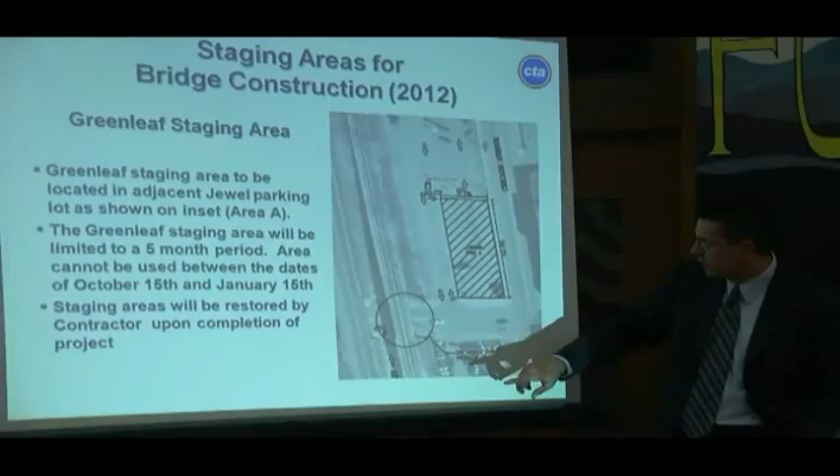We'll also replace all the ties, the rail, and the ballast on the new bridge, and improve the drainage systems off the bridge. We need to relocate many of the signal and communication cables that are part of our infrastructure system. Obviously they pass over the streets along with the bridge, so we have to relocate some of that in order to do our work.

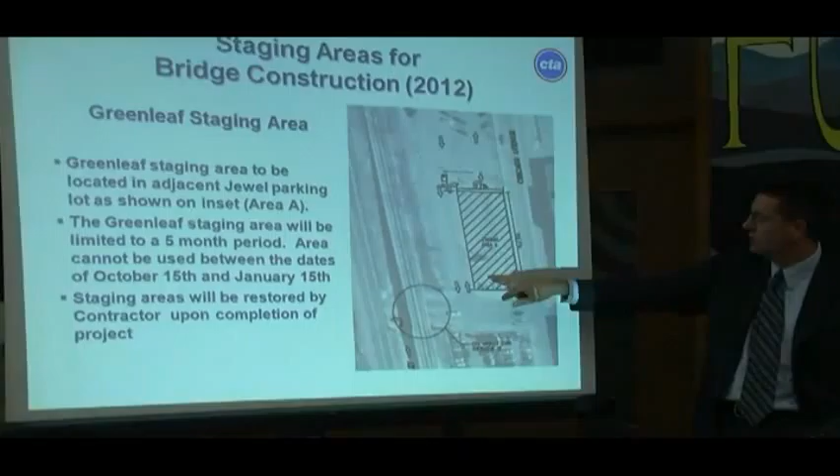Once we're done with the bridge, we'll fix the sidewalk, install new fencing, and some landscaping at selected corners of the four corners of each bridge. So we'll improve that, similar to what we did at Main and Church.

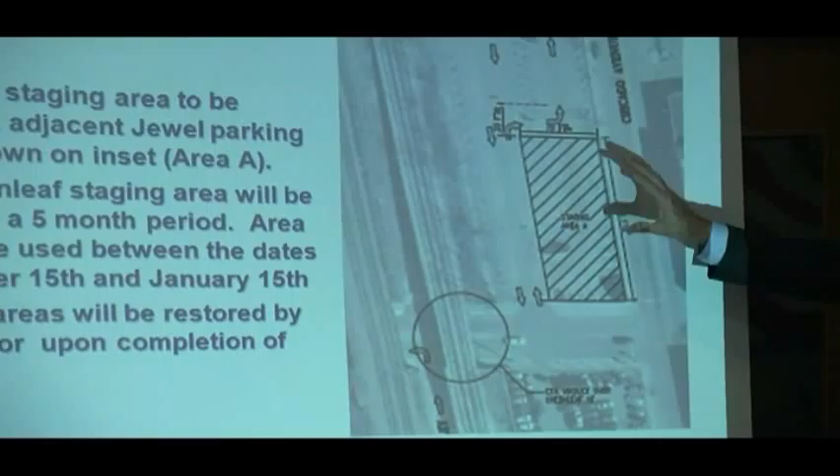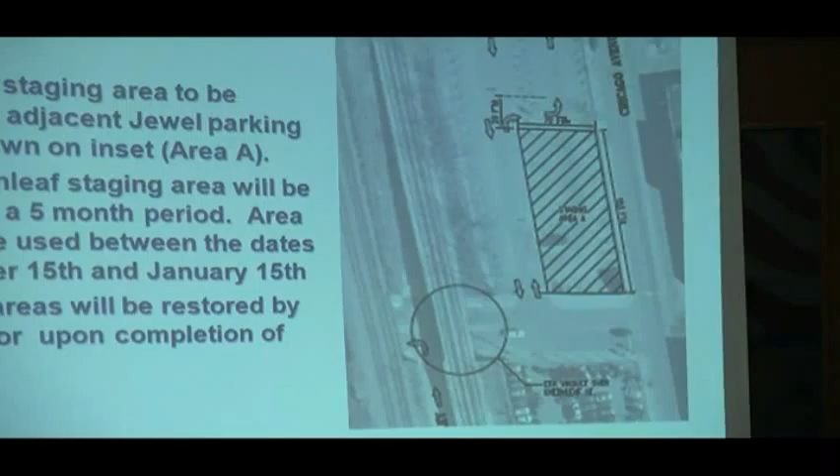We do have to modify the Dempster Station platform slightly in order to accommodate the caisson work on the north side of Dempster, so you'll see a little platform modification. We're just taking a little off the south end, temporarily putting some on the north end, so we can continue to have our normal train operation while we get the viaducts replaced.

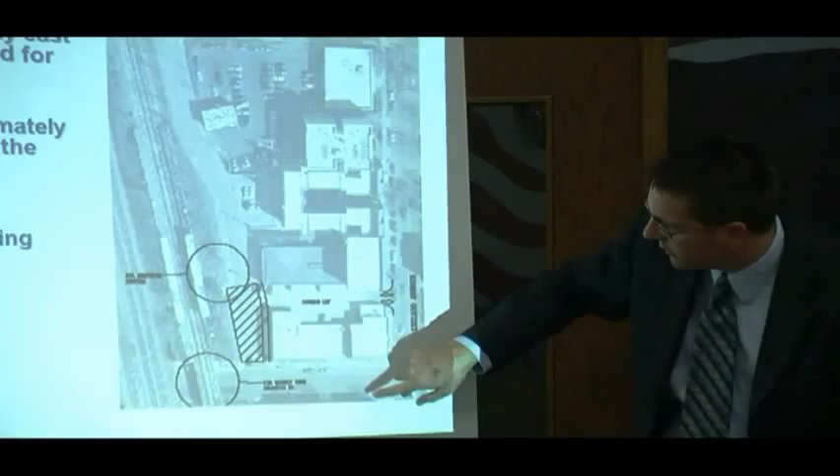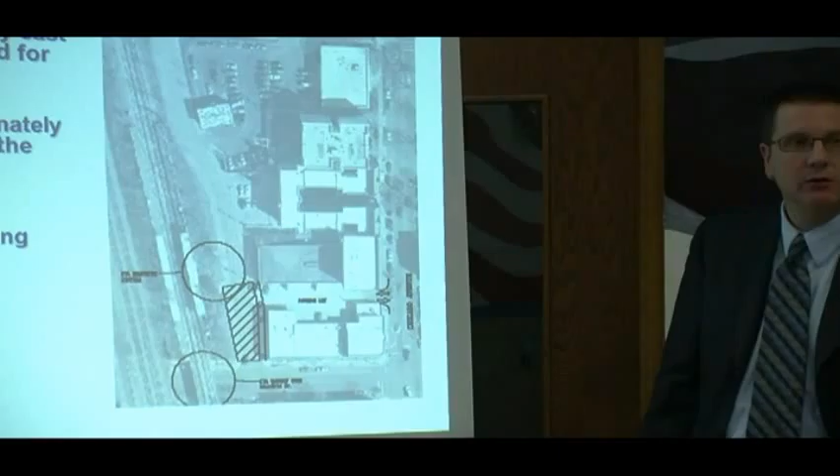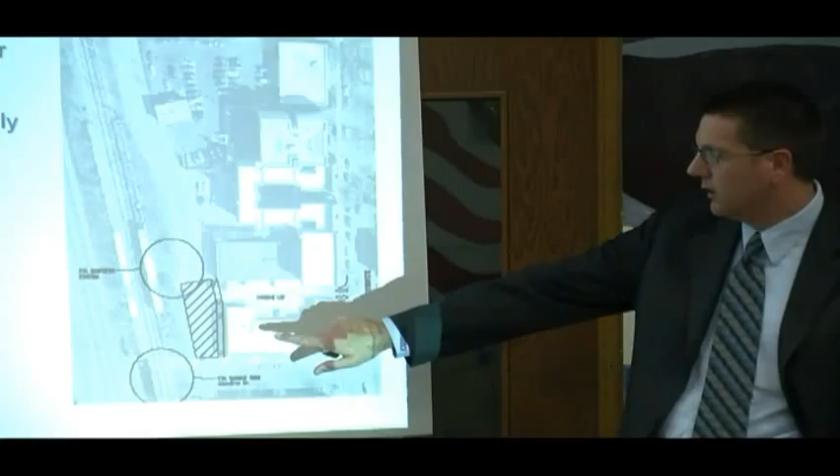Another small piece of work is we're replacing the timber retaining wall north of Greenleaf. That's a wall behind the Jewel food store. We're going to replace that with a precast wall to help hold back our embankment there. And then finally, the rehabilitation of the retaining walls along Chicago Avenue and a little bit behind Greenleaf. So that's really the scope of the entire project.

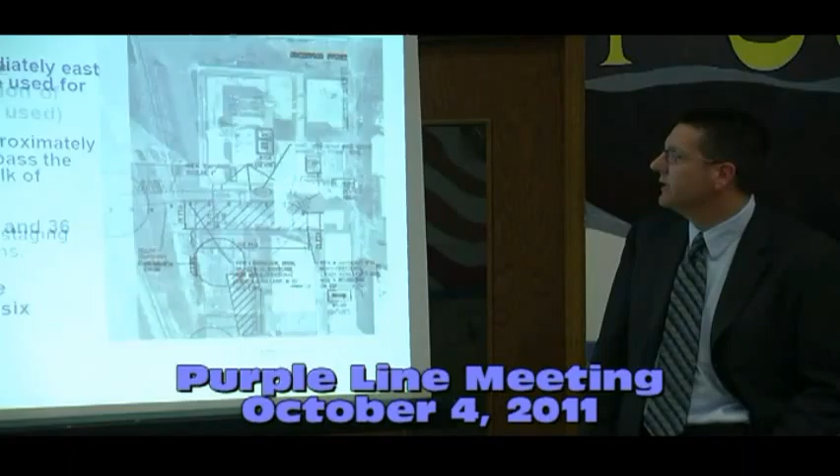Some key information and dates. Again, this is a CTA project, a CTA contract. Our designer of record was Jacobs Engineering. Our contractor is Kiewit Infrastructure. I have two members of Kiewit, Glenn Zika and Mike Ethier, who are here to answer any contractor questions you may have afterwards. And our construction manager is STV Incorporated.

We issued Kiewit notice to proceed on August 18th, so we've already hit the ground running here. Kiewit's got a very aggressive schedule—they want to get in and get this work done.

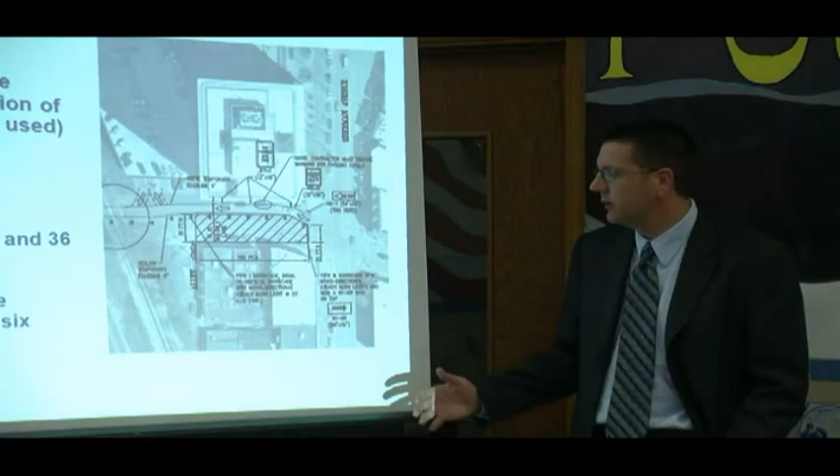Our total contract duration for this contract is 640 days, which by contract would take us out to May of 2013. Now, I do want to make the point that Kiewit's intent is to get this work done a lot sooner than that. This is their contract requirement; however, they are intending to finish the work in 2012. So that's also a good thing.

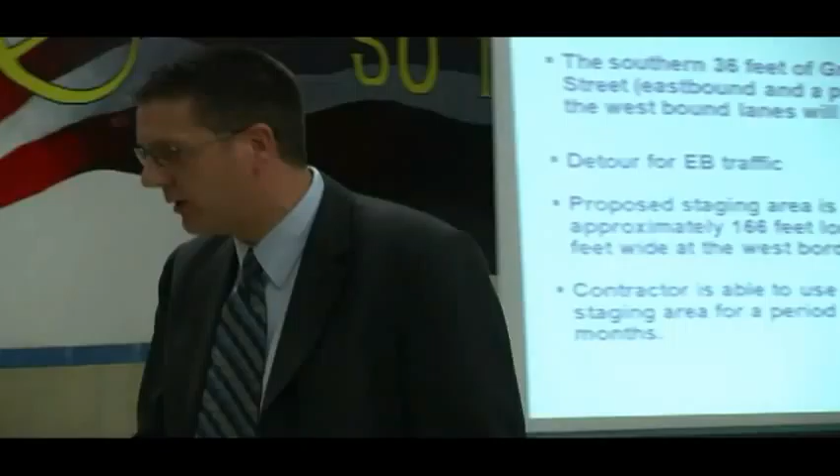So a couple of the key schedule dates and some of the items you're going to be seeing: again, the Chicago Ave retaining wall is ongoing. Retaining wall north of Greenleaf, that work started yesterday, so that's ongoing. The Dempster platform modifications already started. Utility relocations are ongoing—we have utilities to relocate at all three locations, so that'll be happening as we proceed through the fall here in advance of our caisson work.

One of the biggest things involved in this project is to get the caisson work in. The caissons are very deep foundations that support the new bridge structure. There's 4 of them that need to get installed at each viaduct, 1 on each corner of the viaduct. In order to do that, there's a lot of big equipment required—cranes, drill rigs, a lot of trucks, a lot of excavators.

So this is the schedule for the caisson installation at those 3 locations. We're starting at Grove, and between October 10th and October 23rd we'll have a full street closure at Grove with detours, as Paul mentioned. That's when we'll perform the 4 caisson installations during those 2 weeks. There will be some night work during those 2 weeks, so you can expect a little bit of noise and a little bit of night work going on.